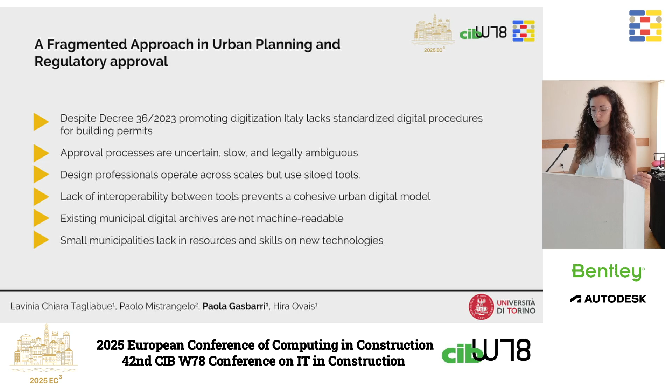And also in our municipalities, digital archives are not machine readable. And there is also a lack of users who have skills in new technologies. From a European perspective, we can see a common pattern, but challenges remain in fragmentation. And there are some projects that aim to integrate BIM and GIS for building permit procedures, but there are also challenges, for example, in translating the regulation into structured machine-readable formats.

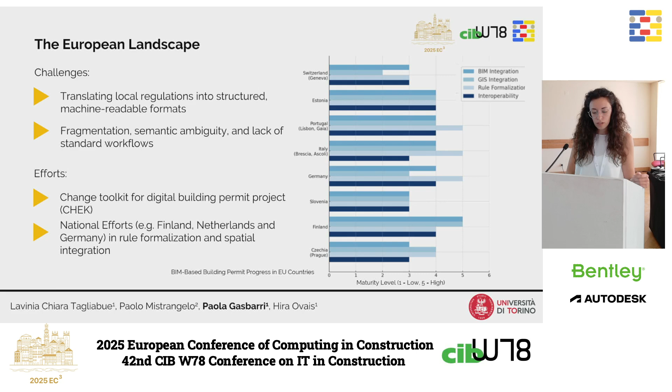So to consider these challenges, we don't have to see only GIS and BIM tools, but we have to consider also IoT systems, because more data-driven decision-making in real time is required for the management of the urban city. So we have these three different resources, which of course have different scopes and different data structures. There are some efforts in providing standards like IFC and CityGML, but they are not always sufficient to fill this gap of integration.

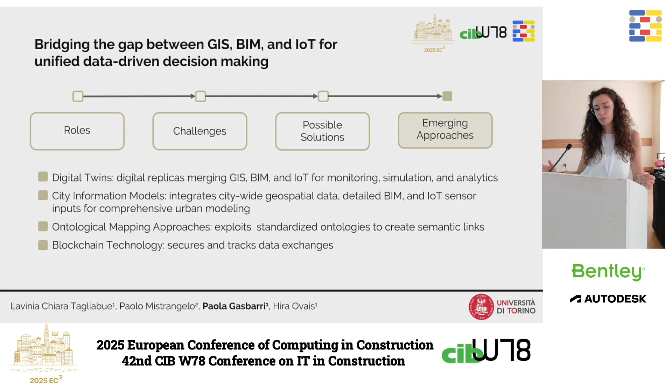So we have to look, as a possible solution, at the exploitation of a common data environment for centralized data management, and also the exploitation of AI and machine learning for the integration of semantic data. As an emerging approach, we have, of course, digital twins and city information models, but we have to look also at ontological mapping approaches, which exploit standardized ontologies and create semantic links. Of course, there is also blockchain technology that ensures trustful and secure data exchanges.

So Policad, what is Policad? Policad is a tool that we are developing, whose aim is to facilitate the integration of BIM and GIS toward digital building permit processes. And the difference between Policad and other tools is that usually the compliance check of a project model is done at the end of the process. But with Policad, we can check the compliance at the beginning of the design stage.

So we have to make some premises that led to its development. For example, every design form possesses a physical extension in a specific location, which is related to the georeferencing of the geometries, and also aligns with the planning regulation demand. And each architectural object should establish a relationship with the existing structures even before they exist. So we have to look not only at what is already built, but what will be built in the future.

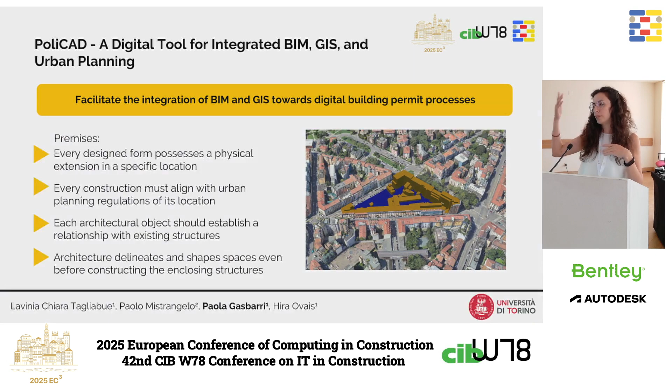So how Policad works: at first we have to find some sources, for example, from the Cadastre, and we can search for raster formats, GeoJSON, but also vector formats. Then they can be imported into Policad, where they are georeferenced, and according to this imported documentation, a BIM-like model can be created, and during the creation phase, queries can be run on the model to see if the proposed design is compliant with the regulations of the cadastre and the urban plan.

So in the end, the model can be exported to several formats like GeoJSON and IFC, but also PCAD, which is the native format of the Policad tool. And in this way, it can then be imported and shared by the user through APIs like Mapbox or WebGIS platforms.

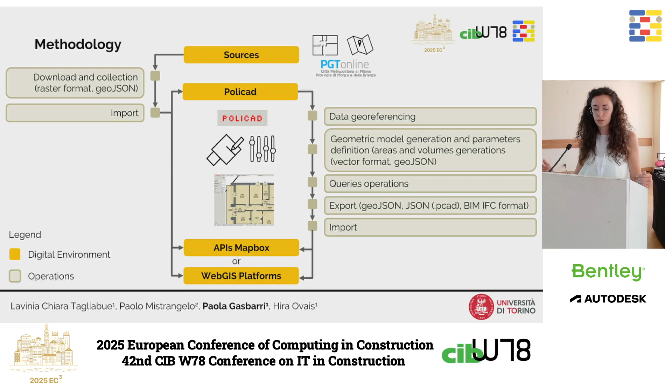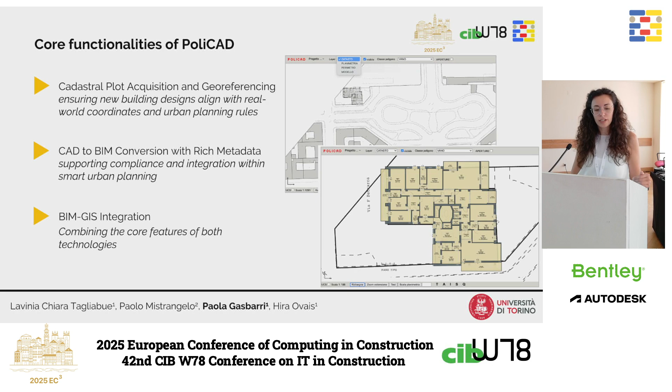So we see here some core functionalities. We have cadastral acquisition and georeferencing, and an easier CAD to BIM conversion, because when a CAD line is imported into the Policad tool, it can be translated into a georeferenced surface and assigned to a category with specific parameters. This makes for an easier BIM-GIS integration, exploiting the features of both of them.

So, as I mentioned, surfaces are defined and classified according to parameters, and in this way Policad can import a large amount of data. In Policad, it's also possible to create a context around your building, adding a 3D urban model, and this will provide not only contextualized visualization, but it can also be exploited for solar analysis or zoning regulation compliance checks.

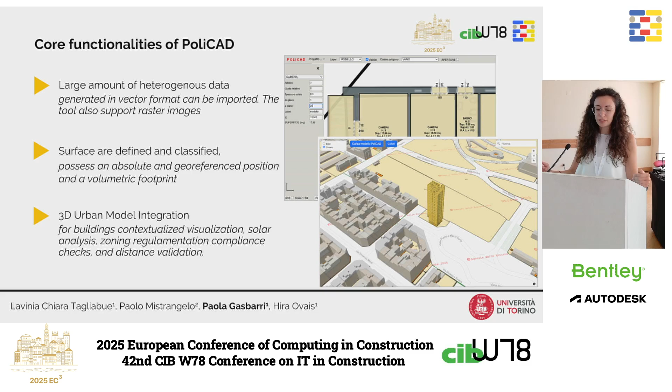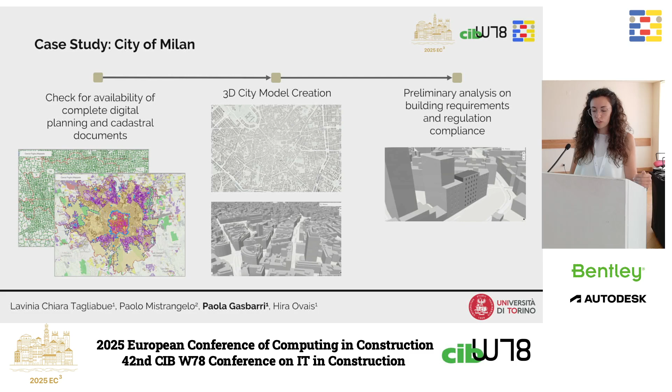We used the city of Milan as a case study, so we checked for the documents to add to the tool. Then we created the 3D model of the city, and we checked for preliminary analysis. As a result, we see that with our method, the average time for preliminary checks drops from 3-5 days to 1-2 hours, which is really fast, because the check is made during the development of the model.

Also, because we can input the cadastral information at the beginning, the accuracy of the geospatial position is higher, and the compliance error rate is lower than the manual process done these days. And we also have high data format interoperability, and we provide easier user accessibility, because the user is not required to use several software, but just one.

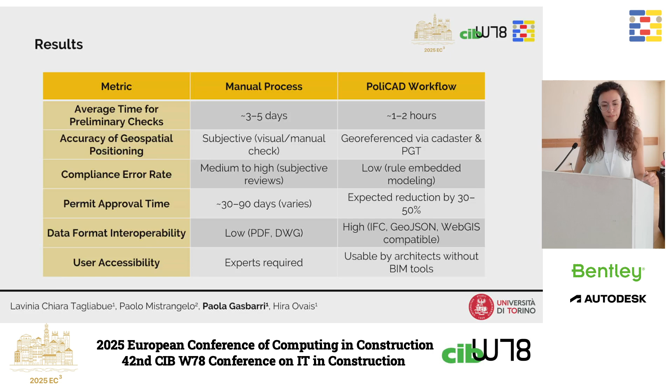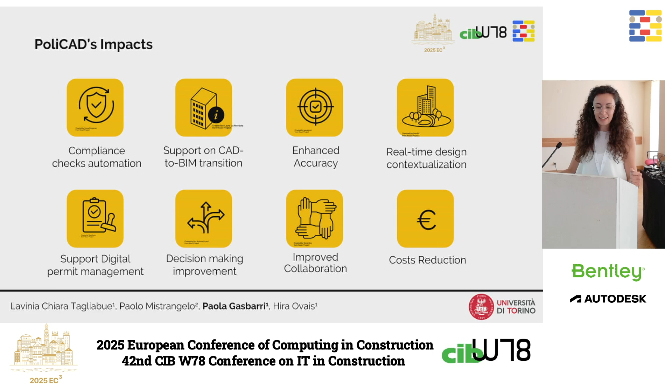So we have here a summary of the impact: compliance check automation, support for digital permit management, improved collaboration. Of course, less time means less cost, and support for CAD to BIM transitions.